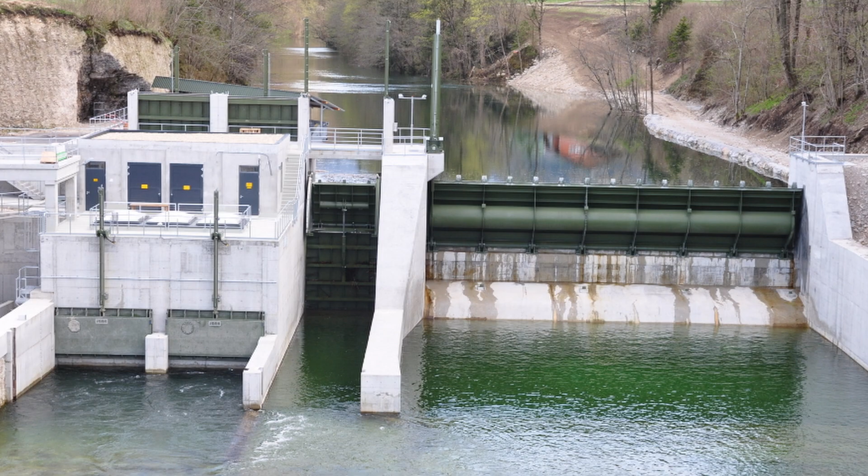Most of the large German political parties agree that hydroelectric power is a needed renewable resource and has to be financed. The major split occurs, however, when discussing which power plant shall be funded. Big and small power plants divide the politics, as some say only one of them is to be funded, while others say that both are important as they are.

Renewable energy evolved over time in Germany, from being non-existent to accounting for almost half of the energy produced. The Federal Ministry for Economic Affairs and Energy proves to be a sufficient source to determine this change in the German energy production and consumption.

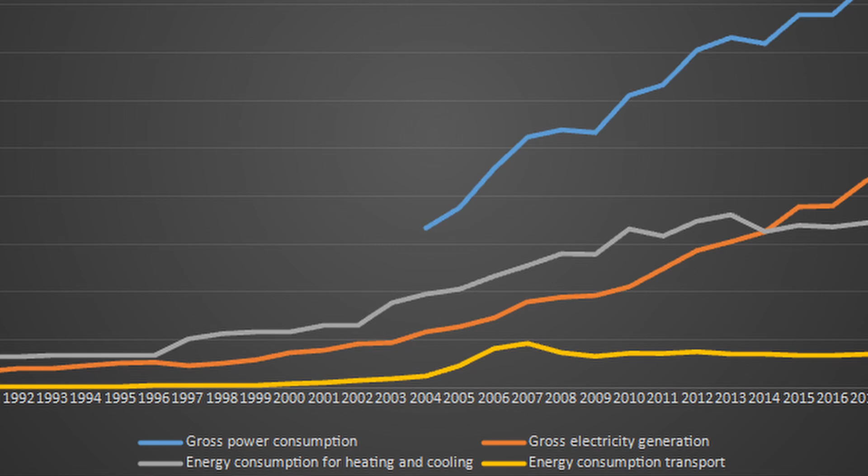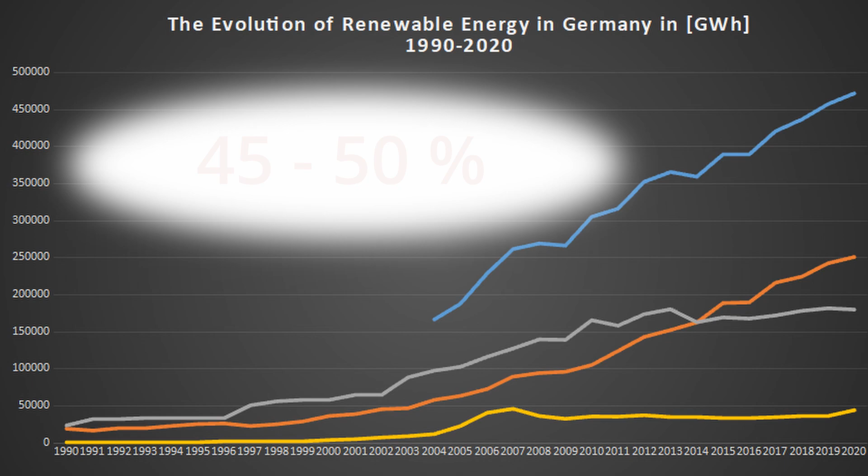Before looking at the production of hydroelectric power in Germany, we need to figure out how much energy Germany is producing in total. In 2020, Germany used more than 470,000 gigawatt hours and produced around 250,000 gigawatt hours from renewable sources. This means that around 45 to 50% of Germany's electricity comes from green sources.

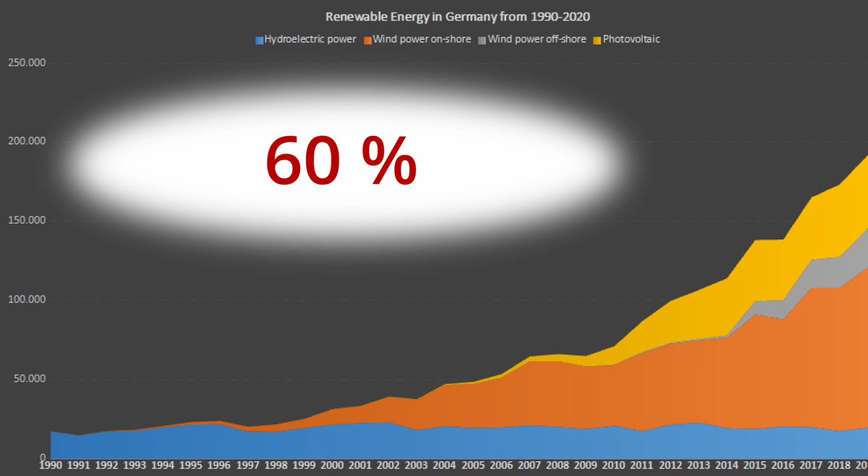Hydroelectric power, however, only makes up a small portion. 18,000 gigawatt hours is produced from hydroelectric power. That is only around 9% of the total 200,000, which is produced from wind and solar together. More than 60% of Germany's renewable energy comes from wind power plants, on and offshore.

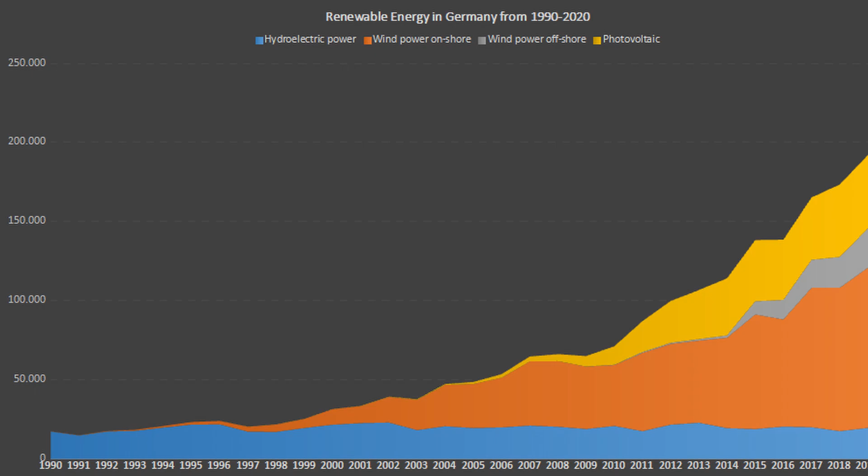In fact, even though hydroelectric power is the oldest renewable source of energy in Germany, its representation shrank, giving way to wind power and photovoltaic plants. You can see that hydroelectric power makes up the smallest portion in Germany's renewable energy sources. Wind and solar power are leading in Germany, and they will, as they are regarded to be more profitable by the government and the public opinion.

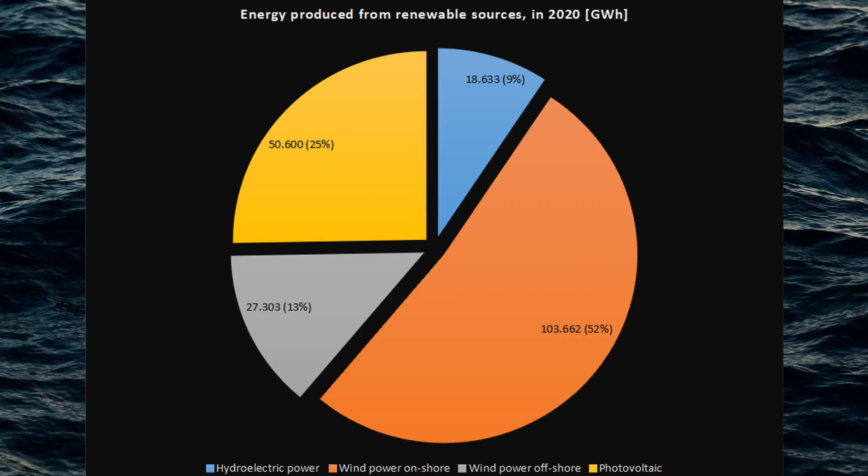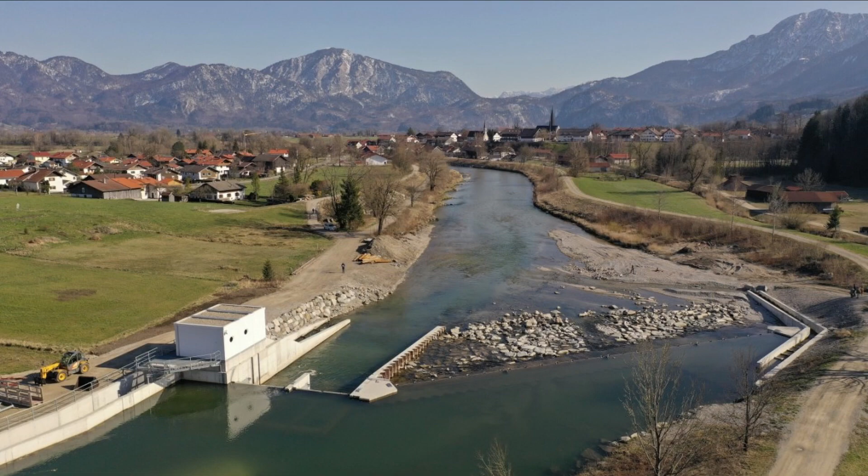The very first hydroelectric shaft power station was built in Loisach in February of 2020 in Germany within the area of Natura 2000. Natura 2000 consists of connected protected areas within the European Union following the rules of the Habitats Directive. This new hydroelectric power plant was designed to be the most animal-friendly and thus got permission to be built in a Natura reserve in Germany.

Still, it got criticism, most notably by a biologist in Loisach, working to preserve the nature and protecting the fish living in the river. The power plant is installed and working under the condition that immediate measures will be taken if the situation of the fish changes. Therefore, if the power plant is as renewable as it claims to be and can protect the local wildlife, we can expect it to be used in many more rivers.

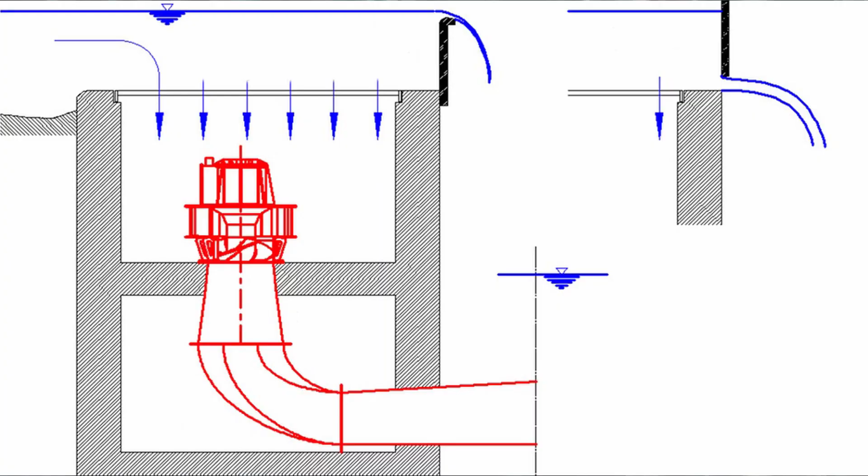The power plant works by having a shaft where the water can flow down and through the turbine, generating electricity, and then continues flowing. The shaft prevents fish from getting close to the turbine. A wall creates a drop of the water, which is needed to create enough pressure to turn the generator.

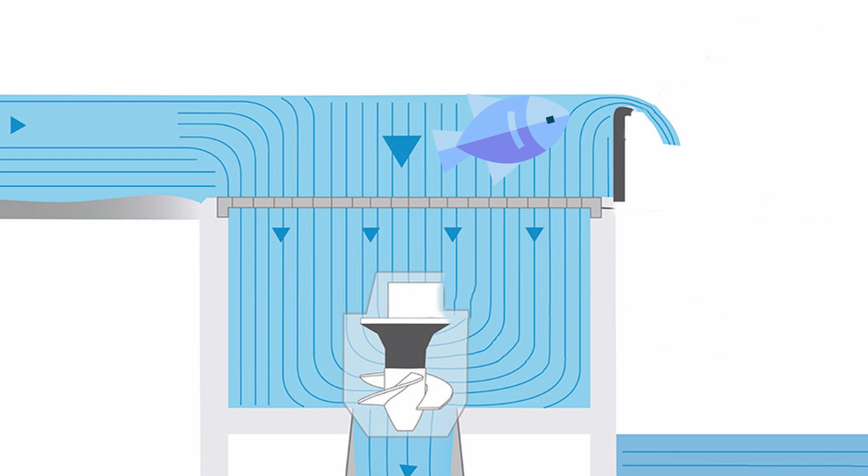There are two holes, one at the top and one at the bottom, to create a way for the fish to escape. A fish ladder creates a path for the fish to go against the current and back up to reach their spawn area. Thanks to the large surface area of the shaft, the created current that would suck the fish down is small and negligible. Such a system allows several turbines to be lined up in a row, therefore saving space and increasing efficiency, as we do in Germany.

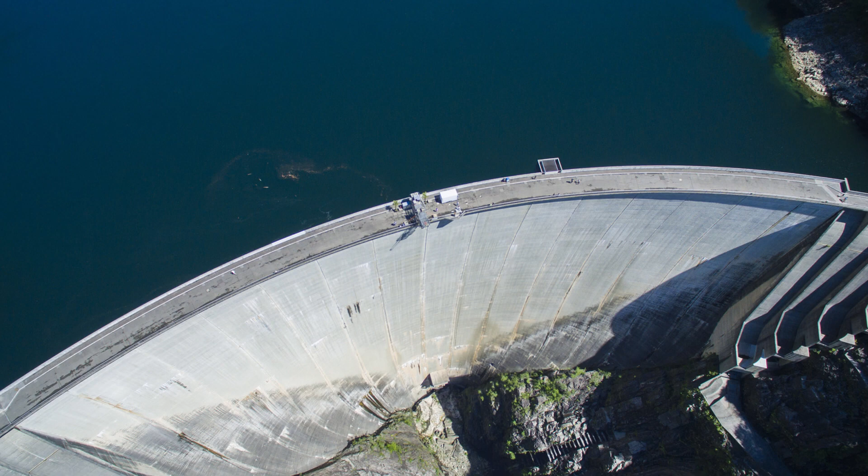Hydropower has many advantages, but there's still the word power behind it, which is associated with dangers. Dams have to withstand a lot of force, which they usually do. But accidents do happen sometimes. External influences can cause a lot of damage due to the amount of water. For this reason, dams are a popular target in war.

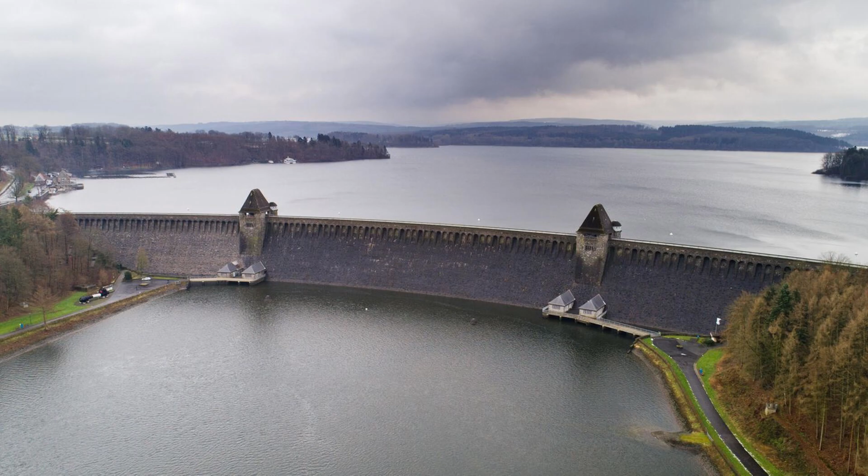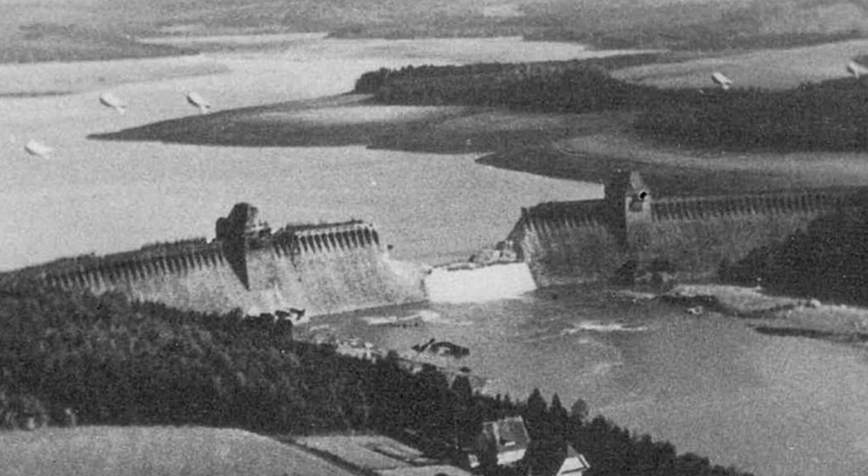The blowing up of the Möhne Dam not only caused a wave of destruction, but the water level in some villages and towns near the river increased dramatically. Among the 1,600 victims were 1,000 prisoners of war and immigrant workers. This shows that in such an attack, the scale is unpredictable, and mostly innocent people die or suffer from the destruction of their homes.

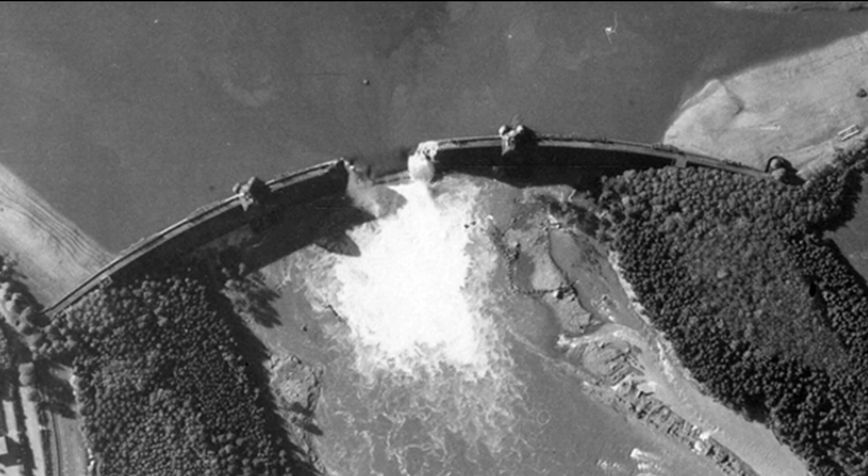Another accident that was not caused by war was the dam break of the Ibra Dam in 1977, which was caused by a thunderstorm. Fortunately, no people died, but it cost 30 million D-marks, which is about 15 million euros today. The force of the 3-meter high flood wave destroyed many houses and kept several fire brigades busy. The destroyed dam was rebuilt in 1979.

These two examples show the fatal consequences of accidents in connection with hydropower, although they usually happen extremely rarely. Concludingly, under normal operating conditions, there's almost no danger. Germany's water power plants generate sufficient green energy, and with the invention of the shaft power plant, we can be sure that hydroelectric power plants will continue to provide clean electricity. Still, compared to other clean energy sources, water power makes up the least amount of green energy produced.